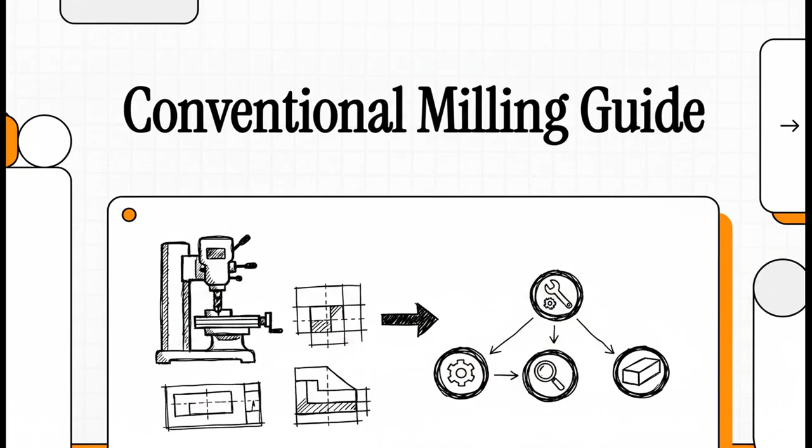All right, today we're stepping right into the machine shop. We're going to break down a real powerhouse of precision engineering, the conventional milling machine. We've taken some raw lab notes and we're turning them into a simple step-by-step guide so you can see how to take a chunk of metal and turn it into a finished part. Let's get right into it.

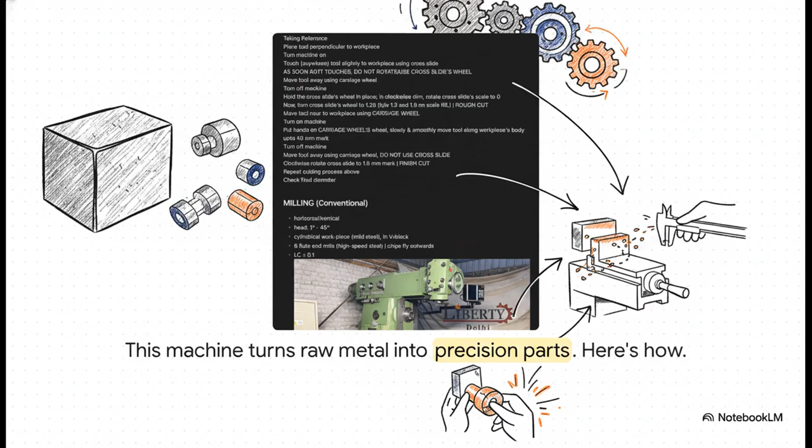So this is it, the conventional milling machine. This beast takes a rough piece of metal and just carves it up with incredible accuracy. But the real question is how? What are the exact steps you need to take to go from that raw stock to a perfectly finished part? Well, that's what we're here for. We're going to walk you through the whole process.

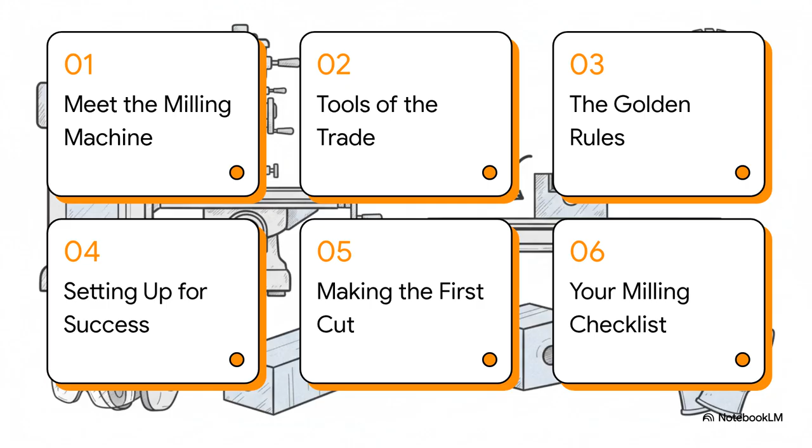So here's our game plan for today. We'll start by getting to know the machine and its tools. Then we'll cover the absolutely non-negotiable safety rules. After that, we'll walk through the entire process, from setting up to making that final cut. And to wrap it all up, we'll finish with a simple checklist to make sure it all sticks.

Okay, first things first, let's get properly acquainted with the machine itself. Understanding its core components is really the key to operating it well and, of course, safely. Think of this machine as a whole system working together. You've got the head up top, which can be angled for all sorts of versatile cuts. The spindle, that's the heart of the operation. It holds and spins the cutting tool.

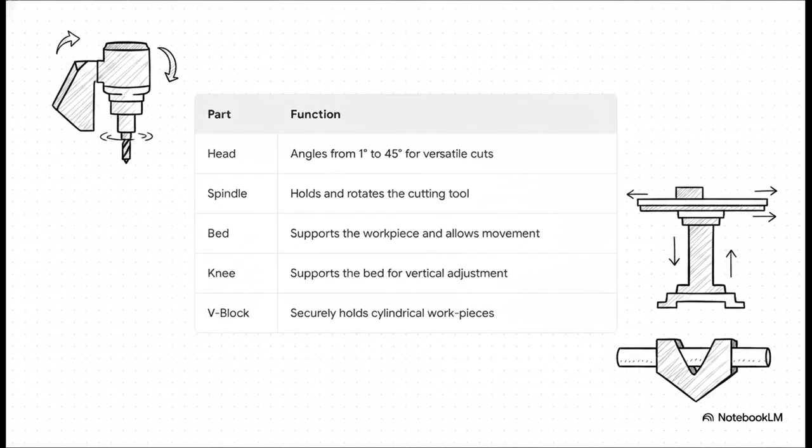Your workpiece sits on the bed, which moves side to side and front to back. The whole bed is held up by the knee, and that's how you adjust your height. And for this job, we're using a V-block to hold our round part nice and secure. All right, you can't exactly make a cut without the right tools, right? So let's move on and see what we'll be using to shape this metal.

For this operation, our go-to tools are the cutters, of course, end mills, and a face mill, which is perfect for creating those super flat surfaces. For precision, we're gonna rely on vernier calipers for all our measuring. And this might surprise you. A simple hammer is one of the most important tools here. It's how we make sure our workpiece is locked down tight and isn't going anywhere.

Okay, stop. Before we even think about turning this machine on, we have to talk about safety. This is, without a doubt, the single most important part of the entire process. You've got to respect the machine, and that starts right here. So I've got a question for you. What's the most important part of any job in a machine shop? Is it the precision? The speed? Nope. It's walking away at the end of the day with all your fingers attached. It's safety. Every single time.

These rules need to become second nature, like breathing. Know where your on and off buttons are without even looking. Keep your hands on the wheels when it's running. That's your control. And always, always use slow, smooth movements.

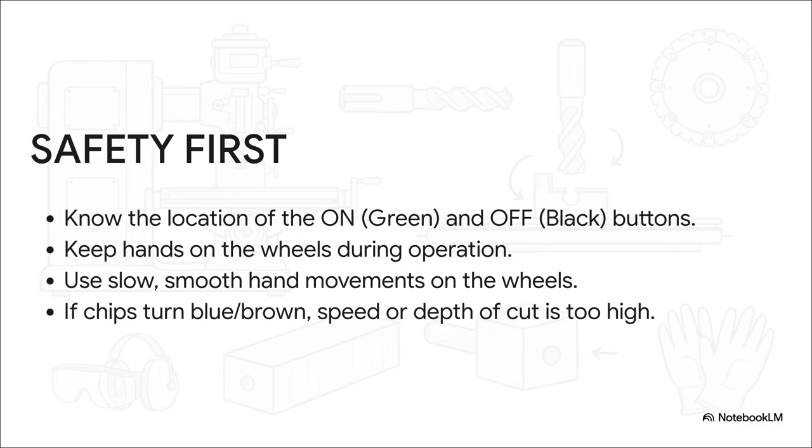And here's a huge tip. Watch the chips coming off the metal. If they start turning blue or brown, that means things are getting way too hot. That's the machine's way of screaming at you to back off on your speed or the depth of your cut, immediately. With safety front and center in our minds, we can finally move on to the setup. And just like with any craft, proper preparation is what separates a pretty good result from a great one.

So what's our actual goal for this task? It's simple. We're going to perform what's called a facing operation. That just means we're going to remove exactly 2 millimeters of material from each side of our cylindrical part to create 2 perfectly flat, parallel faces.

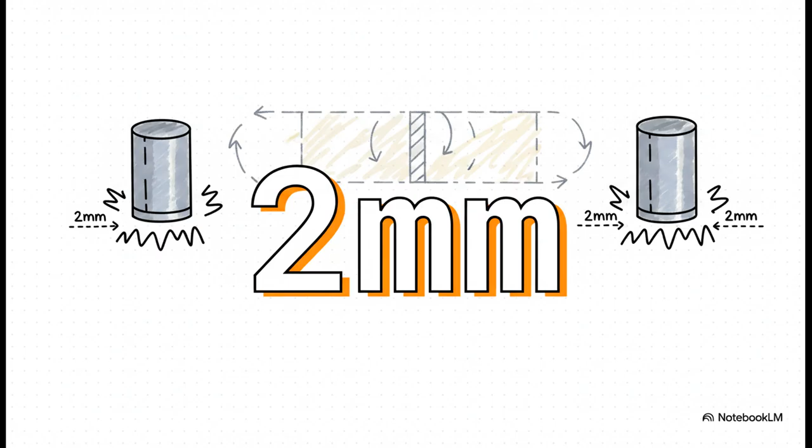Now, to hit that 2 millimeter target with absolute precision, you have to understand this term, least count. It's just the smallest, tiniest little increment the machine can measure and move. For our vertical z-axis, the least count is 0.1 millimeters.

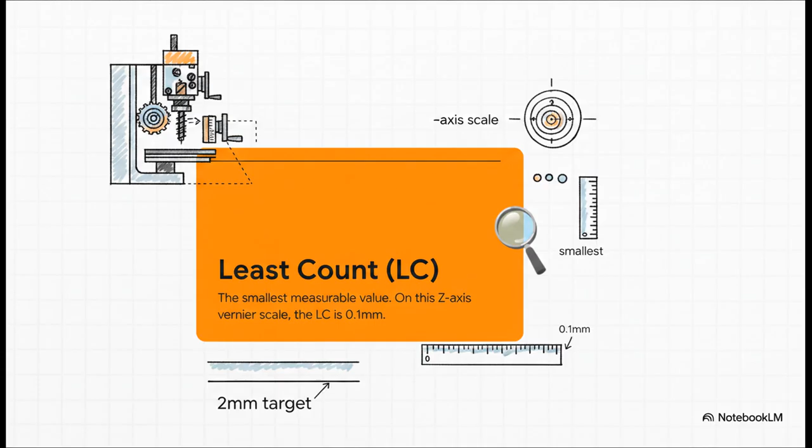That means every single little mark on that dial represents a movement of just 1/10 of a millimeter. That's how we get this so accurate. Okay, step 1. Any dirt or little metal chips in the V-block can throw your whole setup off, so clean it out until it's spotless. Then place your workpiece in there and clamp it down. And don't be shy. Give it a few firm taps with a hammer on the end. You need to be sure it's absolutely solid and won't shift even a tiny bit during the cut.

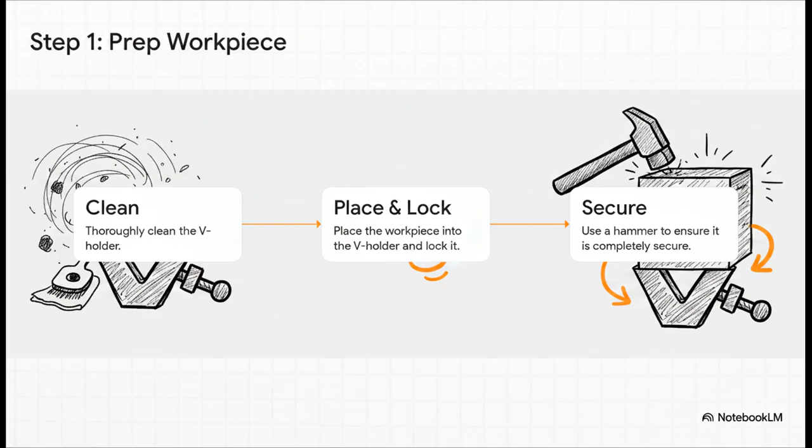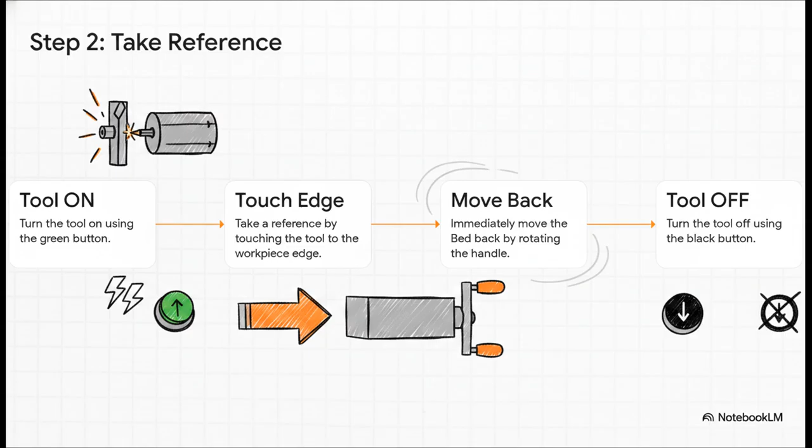This next step is so critical. It's called taking a reference. You turn the spindle on and then very carefully bring the spinning tool over until it just kisses the edge of the workpiece. The moment you see a tiny spark or hear that little touch, that's your 0 point. That's your starting line. Immediately back the tool away and turn the machine off. You've now established your starting position for everything else.

All right, the machine is prepped, the workpiece is secure, and our reference is set. It's time to make some chips fly. Let's walk through the first cut step by step. But before we do, let's quickly define depth of cut, or DOC. This is simply how deep the tool is going to bite into the material on a single pass. We control this very precisely using the machine's handles and those vernier scales. For this job, we're going to be taking really shallow cuts.

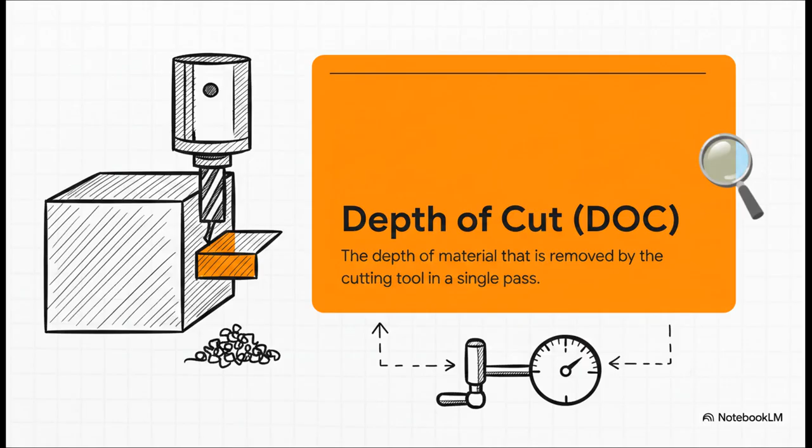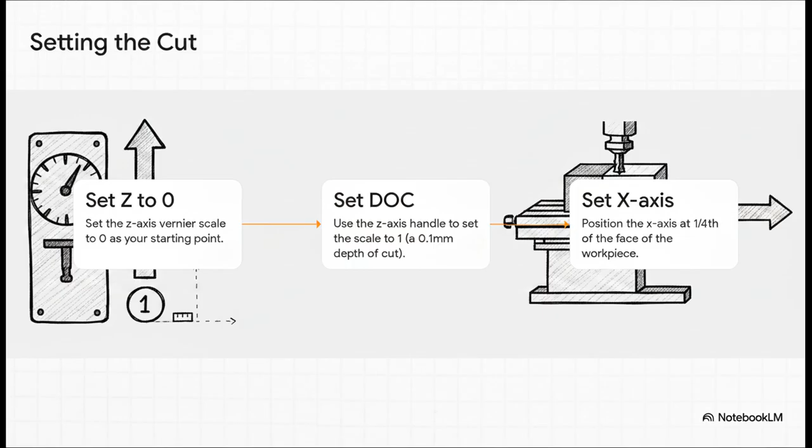So now we put it all together. First, set the Z-axis dial, that's your vertical control, to 0. This calibrates it to that reference point we just took. Next, turn that same handle to move the dial to the 1 mark, and since our least count is 0.1 millimeters, this sets our first depth of cut to just that, 1/10 of a millimeter. Finally, you just position the tool along the X-axis so it's ready to cut the first quarter of the workpiece's face. And here we go.

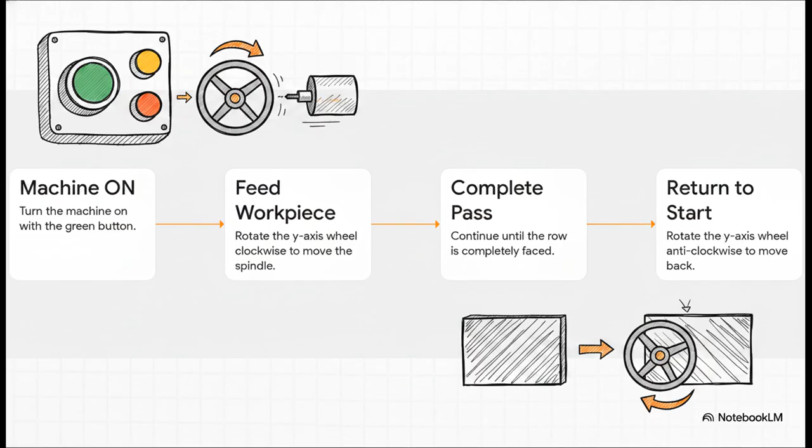Turn the machine on. Using the Y-axis wheel, you're going to make a slow, smooth clockwise rotation. This moves the bed and feeds the workpiece into the cutter. You just keep this motion going until the tool has passed completely over that first section. Then you just rotate the wheel the other way, anti-clockwise, to bring it all the way back to the start. One pass down. Now you just use the X-axis handle to shift the workpiece over so the cutter lines up with the next quarter of the face.

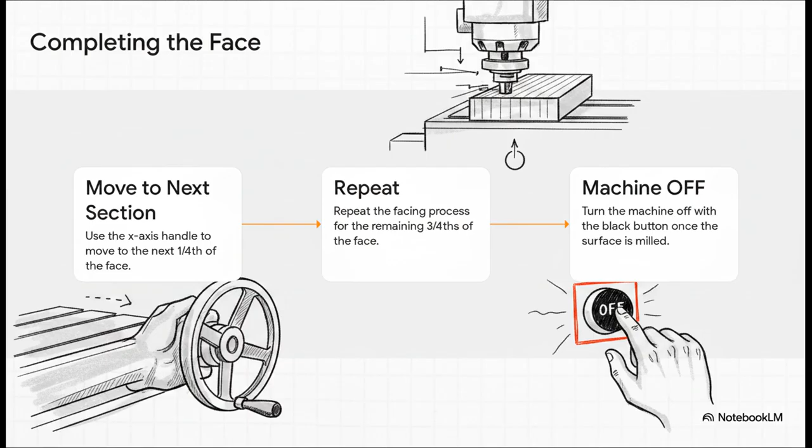Then you just repeat the process. Move the Y-axis in, then back out. You're going to do this for all 4 sections until that entire surface has a clean, beautiful machined finish. Then, and only then, do you turn the machine off. So we've only taken off 0.1 millimeters. To get to our 2 millimeter goal, we just repeat. You raise the knee by turning the Z-axis handle to the 2 mark for another 0.1 millimeter cut, and you do all the passes all over again.

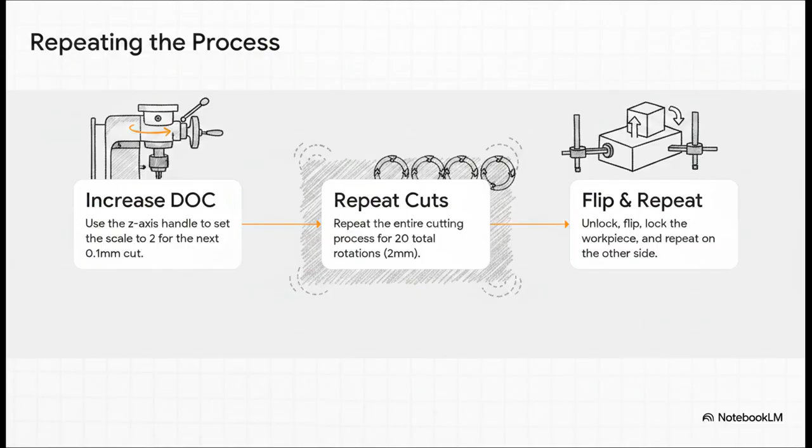You'll keep doing this, advancing the dial each time until you've done it 20 times. That's your 2 millimeters. Then you unclamp the part, flip it over, lock it down again, and do the entire process from scratch on the other side. Patience is key. Whew, that was a lot of steps, I know. So let's just boil it all down into a super simple checklist that covers the most critical points of the whole operation. If you remember anything from today, remember this.

Start clean. Lock it down tight. Always, always take a reference to establish your 0 point. Set that Z-axis dial to 0 before you dial in your first cut. And, most importantly, always turn the machine completely off before you make any big adjustments or unclamp your part. Safety and precision, they really go hand in hand.

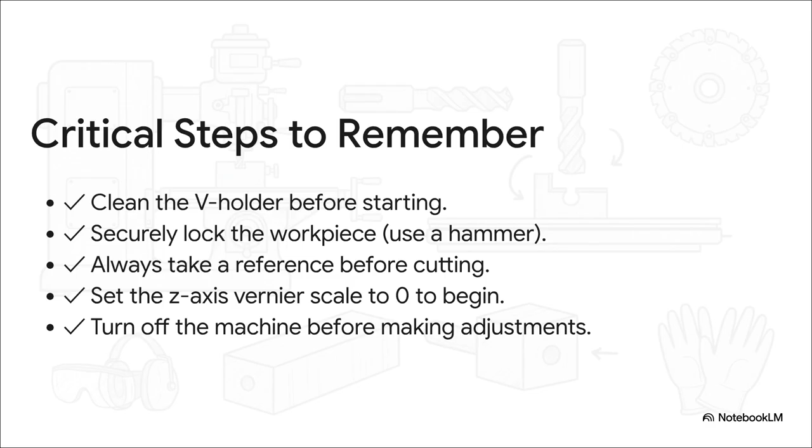And that's the process, from a raw cylinder to a precisely machined part. It's a fundamental skill, and it really opens the door to creating almost anything you can imagine. So now that you've seen how it's done, I gotta ask, what's the first thing you would make?